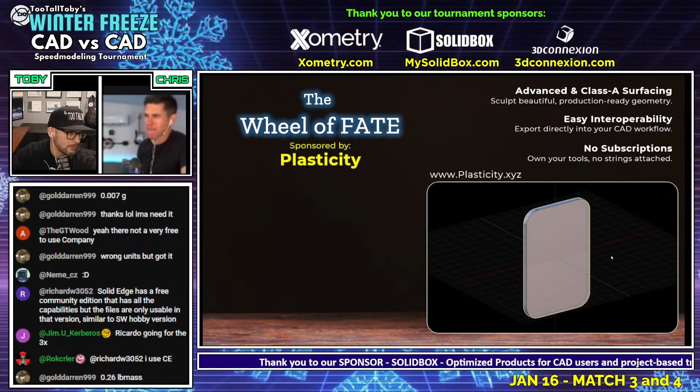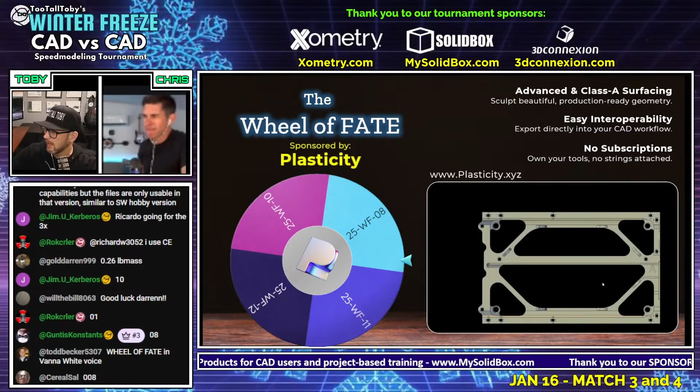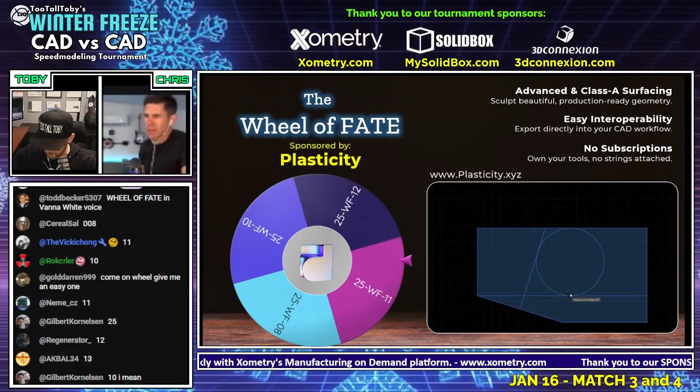Here we go, let's give this thing a spin. Let's see what challenge is in store for our runners. Okay.

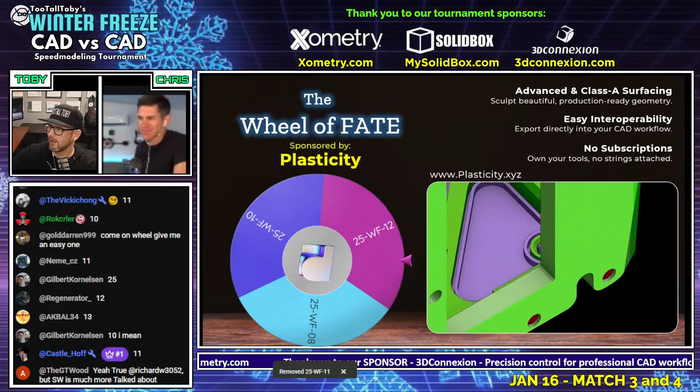Challenge number 11. Let's go, let's go, let's go. We're going to remove that one from the list. So here we go, Chris.

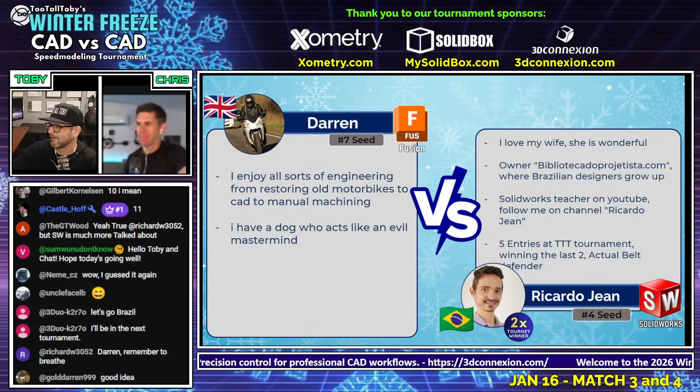This next CAD vs. CAD battle featuring Darren from the UK, our number 7 seed running Fusion, going up against Ricardo Jean from Brazil. He's a 2-time tournament winner, a world champion of 3D CAD speed modeling, and he's going to be running SolidWorks. This CAD vs. CAD battle begins in 3, 2, 1.

Go! What is the mass of this multi-body part or assembly, in x.xx pounds? The tolerance is plus or minus 0.01 pounds. We can see that this model is made in inches, and we can see that this is a snow shovel handle.

Both of our runners are grabbing a screen capture of this model. Both of our runners are jumping into their CAD systems, trying to come up with a game plan and trying to model this thing up.

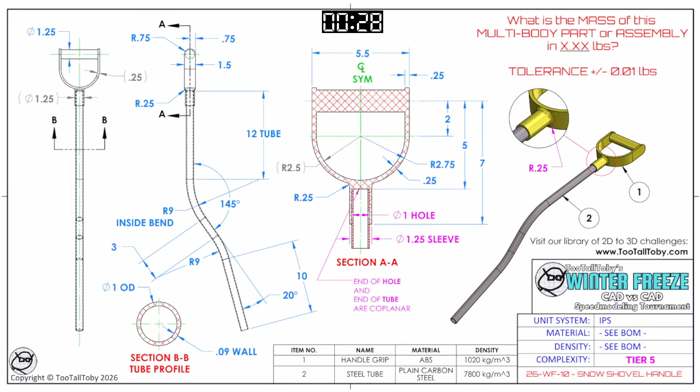It's made from ABS and plain carbon steel. And let's take a look over at the CAD vs. CAD battle. Here we go.

We've got Darren on the left running Fusion, and we've got Ricardo Jean on the right running SolidWorks. Both of our runners are trying to come up with a game plan. It's kind of a tricky part. You've got this tube. There's lots of different tools in 3D CAD to create tubes, to create bent tubes.

And so it looks like both of our runners have decided to start with the tube. Whenever we are working in 3D CAD, Chris, we will look at a model and we tend to kind of discretize the model into different areas. In the case of this model, you'd probably say one area is a handle and one area is the tube. I always find it interesting to see where our runners put the origin and which area of the model our runners begin with.

And in the case of this model, they could have started with the handle, they could have started with the tube, and they both decided to start with the tube. Very, very interesting.

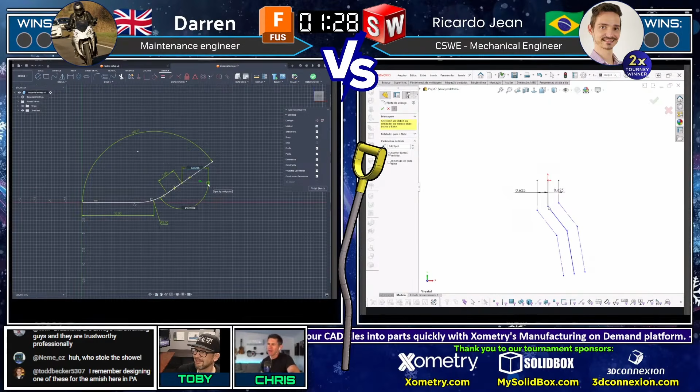I started my stopwatch because this is one of those models that I predicted could be under 3 minutes. I did, because I've seen Ricardo model things like this before real fast, but I'm very curious how, to your point, where they're going to start.

Are they going to treat it as a multi-body part, but some people would say no, that's an assembly, right? So there's some logistical challenges right away. Like, are you going to have the origin at the very tip of the shovel?

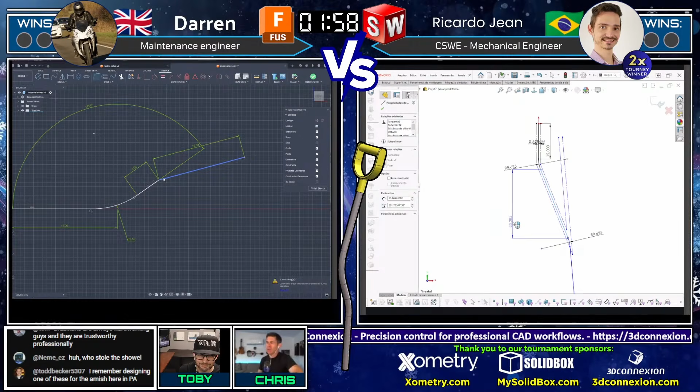Exactly. And if you think about that too long, you lose. It's over. Yeah, it's something that you really need to get in the habit of looking at a model and kind of deciding where's the origin going to be, and why you choose where the origin is.

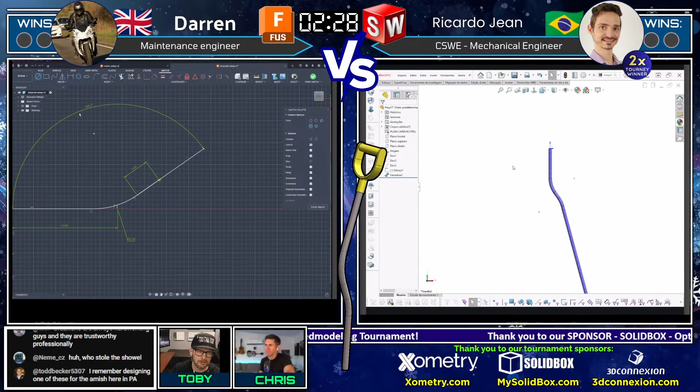It's different for each model, but it's one of those things where the more you practice, the better you're going to get at it, and the more it's going to become second nature.

And so we see here our runners going through and trying to come up with a solution. We see Darren going through, and it looks like he's working on the sweep geometry for that handle.

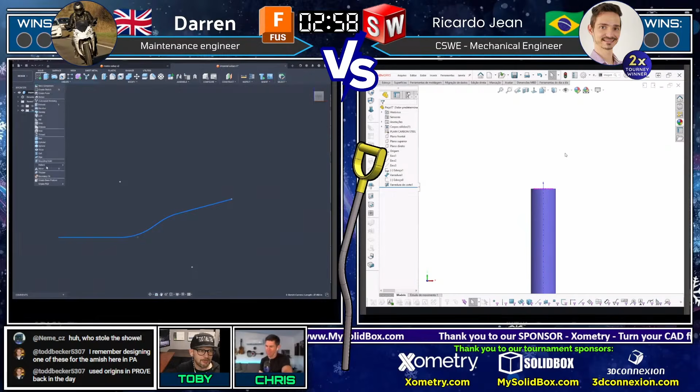And by the way, Chris, I know you mentioned you started a stopwatch. That's actually going to be a thing of the past with the modern technology of the Too Tall Toby CAD vs CAD tournaments. We actually have a clock overlay right on the live stream. So we're currently at 3 minutes for this model.

I'm surprised what I'm seeing, actually. So I can see there's a way to model this for the tournament to get the answer quickly, but that could bite you in the butt later, right?

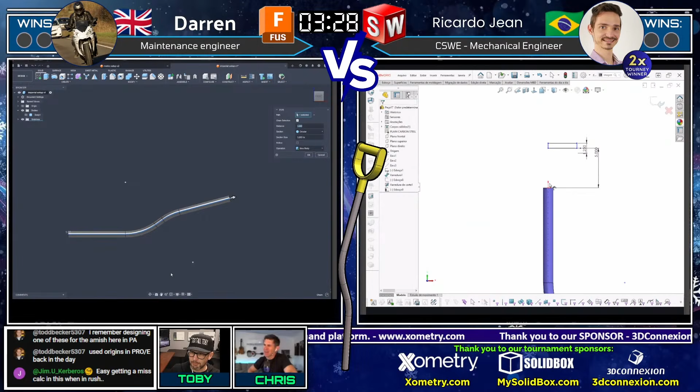Hopefully this is a topic we've had come up quite a bit, and hopefully we're teaching people how to do both. We want you to be fast, but making a fast model that's not stable is not really good.

It's like the analogy of playing scales in music. It's not really good if you can play a scale really fast, but every note is a bad fret. That doesn't really help anybody. You want to kind of think of CAD the same way.

And so recently I've been making videos where I'm trying to show that you can have both. You can speed model and make robust models. You can do both. And that's really the true path to mastery, right?

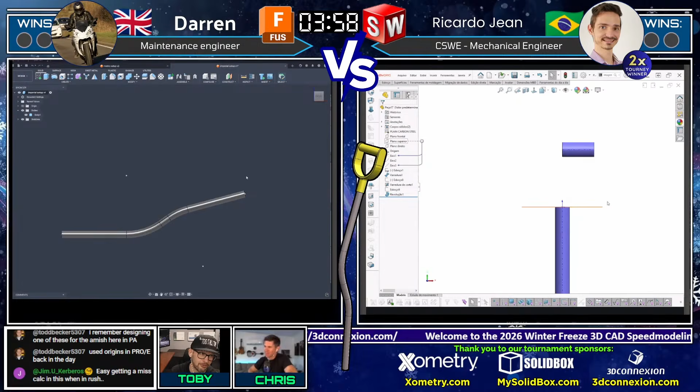If a master electrician comes over to your house, they're going to be able to install a whole new circuit a lot faster than you, but that doesn't mean that they're cutting corners. It doesn't mean they're speed running the installation. It just means they've learned how to master their trade.

They know how to use all the steps, and they know how to get out of a problem quickly if they get into one. And that's what we see a lot of in this tournament too. We see people making mistakes and having to backtrack, and sometimes that's what makes the difference between earning a point or losing and getting knocked out.

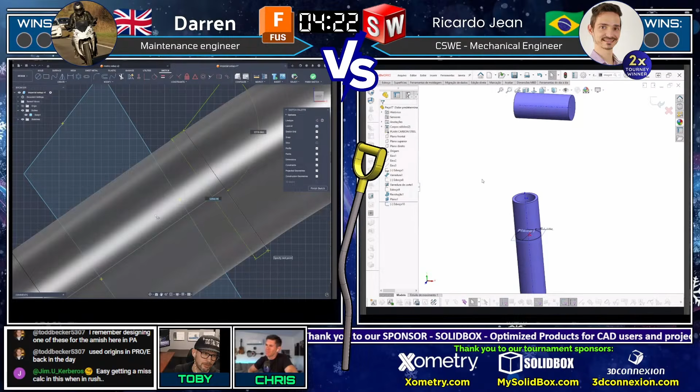One thing I could say is that the level of play in competition now is pretty high, because this kind of part, in the first season or a few years ago, it's been 4 years already - at least where we were seeing really competitive people - this would have taken a while in the old days, I think.

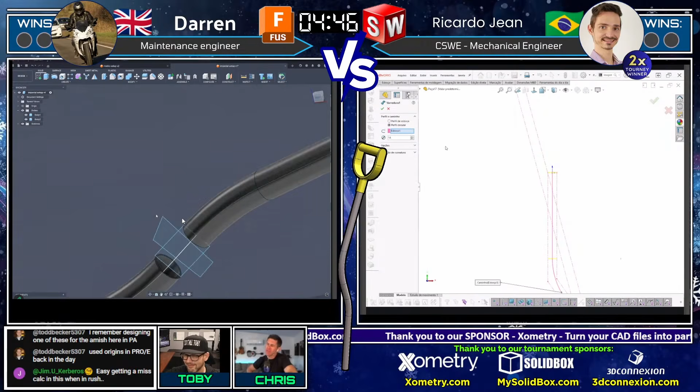So we're at a point where these fairly complex models are still being done under 5 minutes. It's pretty remarkable. It's interesting.

It's cool to see Ricardo Jean kind of struggling here. Really, both of our runners kind of struggling here.

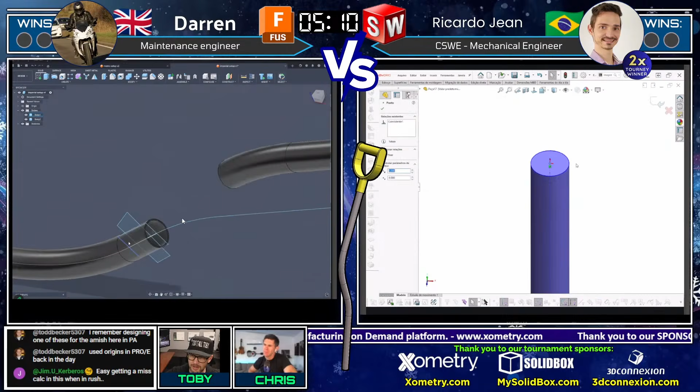This is where I think we can really learn the most from watching these CAD battles and especially reviewing the videos afterwards. Seeing what a professional like Ricardo does when he does get stuck, when he does start getting errors in the tree. What tools does he use?

I saw him use the rollback bar there. I saw him reading the error messages that were in the tree. It's really interesting to see how these professionals troubleshoot when things go wrong. Yeah.

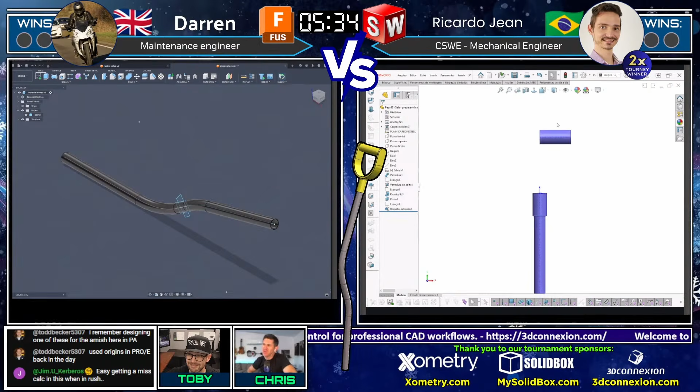One of the challenges with this model is that it's also long enough that you have to zoom in and out to understand where you are at all times. You just kind of reframe it and take a second to make sure you're on track - are you actually modeling this correctly? And so that's a challenge.

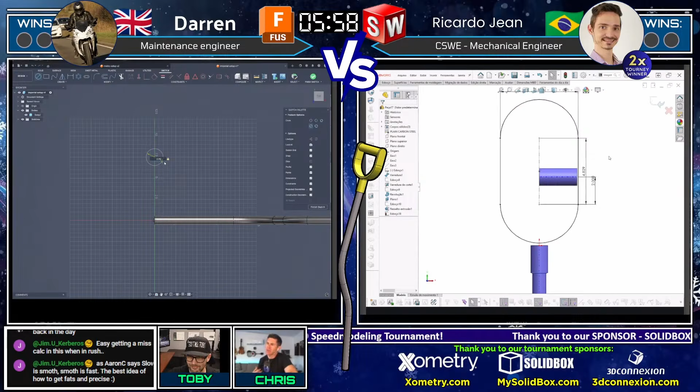I keep wondering if the future of CAD will make zooming and just viewing your model a lot easier. I do hope for a day where VR goggles and all that augmented reality stuff makes it a little quicker to interact with the model.

Because there are some - you start to realize the limitations of working with a 2D screen when you're watching people model something like that's this long and swoopy, and you kind of need to see it in 3D.

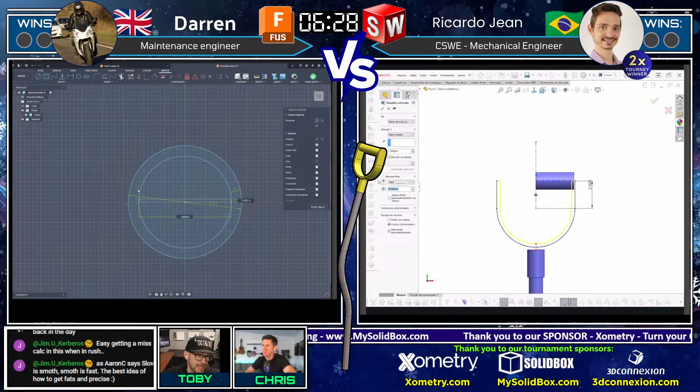The benefits are definitely there for incorporating some of that technology into CAD, and we've seen some innovation along the way. I think that's where probably AI will really start to shine, is making that less herky-jerky. That's kind of the main concern right now. When you go under a set of goggles, things get real, you get motion sickness, it gets real herky-jerky. I think that's where we're really going to see AI shine, in smoothing out some of those interactions.

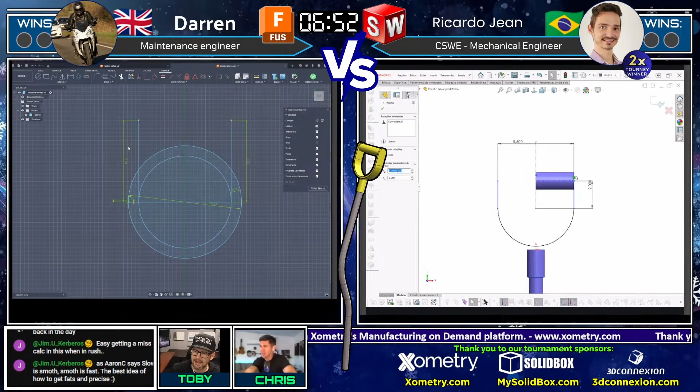Speaking of smoothing things out, it looks like Ricardo Jean is back on track now. He struggled there for a little bit getting that sleeve in place and figuring out where that pipe was going to end, but it looks like he's at least moving through the features a little smoother. You can always tell when you're watching a fellow CAD jockey, when things are going smooth versus going a little sideways. It looks like he's now feeling a little bit more confident, cruising through the features without getting errors.

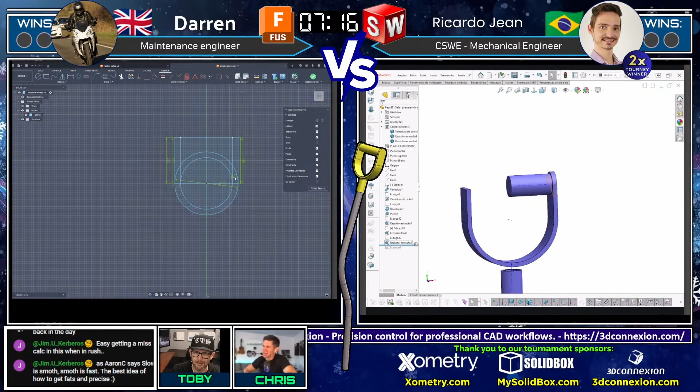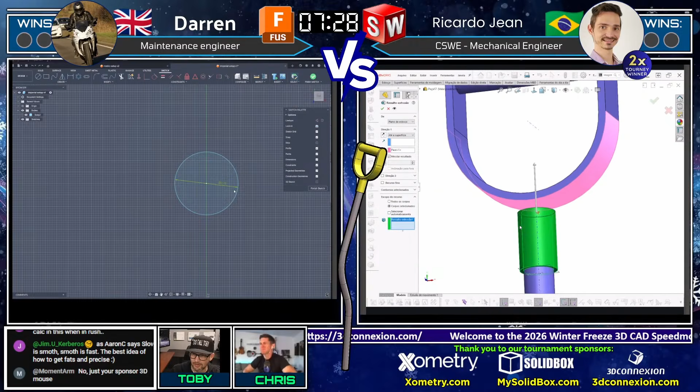Meanwhile on the left, we've got Darren going through, and just like we saw in the last competition, he's at a very similar spot here creating that kind of rounded, almost horseshoe shape for that handle. Now we see Ricardo merging that transition into the handle. Looks like he maybe did a combine there. I think the reason he needed to do that combine was because he needed that common edge to do that fillet he just applied.

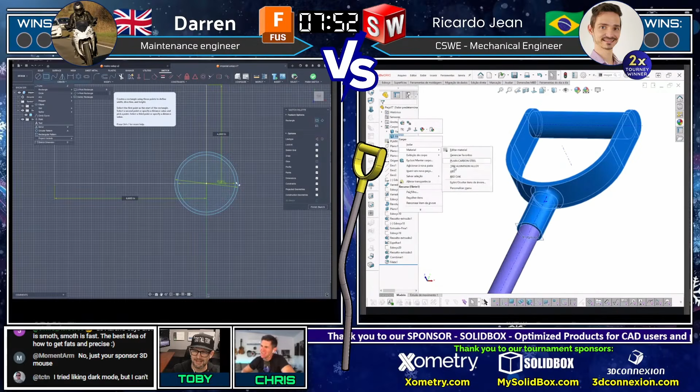You can see it's kind of night and day from where he was about 4 minutes ago. He was just really struggling to get any features on screen, and now it looks like things are moving forward a little smoother. So we may end up seeing an answer here. We're going to keep an eye on the chat and our answer key.

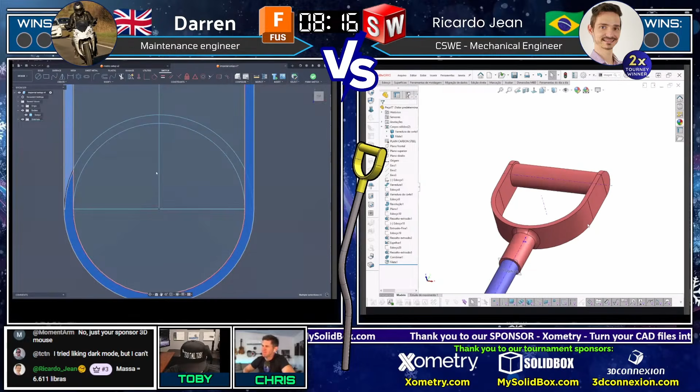It looks like Ricardo has come in with an answer here of 6.611 pounds. That is not correct. So we're looking for this answer in x.xx pounds, and Ricardo's answer of 6.61 pounds is not correct. So Ricardo now needs to go through and examine his models to try to figure out what exactly went wrong, where maybe things were off.

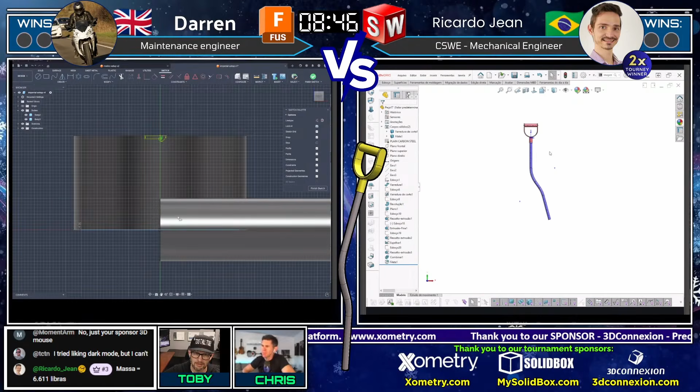He's going to look at the drawing, look at his model, see if he can't spot anything that looks mismatched between the two. Oh, and Darren, interesting — Darren opting to create the handle and the tube in two separate features. Very interesting. And watching Ricardo here, he was modeling it up, deciding to put the handle on a 90-degree angle, maybe coming up with a new design for the shovel. Very interesting as well.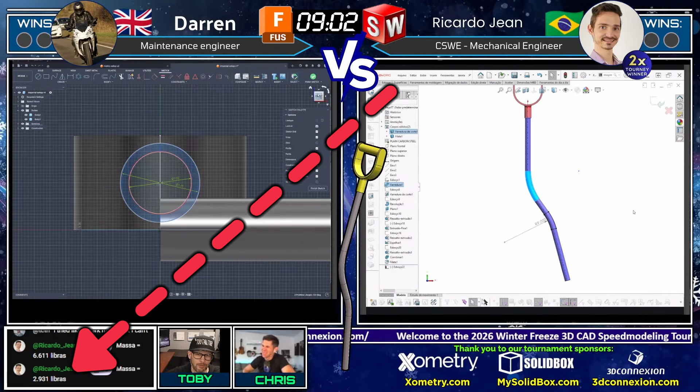I love this, this is where things get kind of interesting. Maybe Ricardo just decided once he got to the point of creating that handle that his orientation was wrong. Of course in the real world you could always just take that body and rotate it 90 degrees, but for the challenge we're doing here, we're only looking for the mass. So some models, it's really important you design them together — for example, that last model with the space heater was one that was really important to design together.

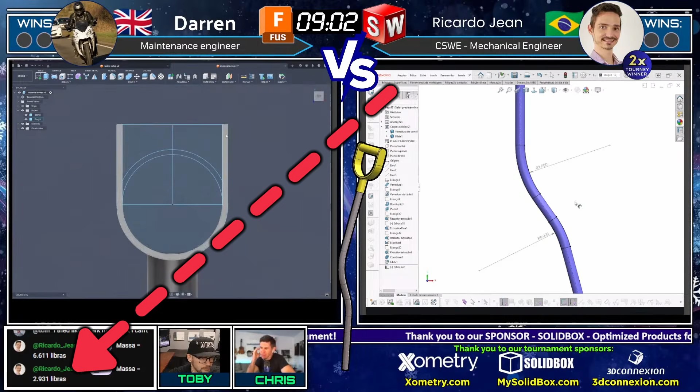Toby, I think we have another mass — there's another mass entry here. And so we're seeing the answer come in here, and it looks like the answer coming in is 2.93 pounds, and that is correct.

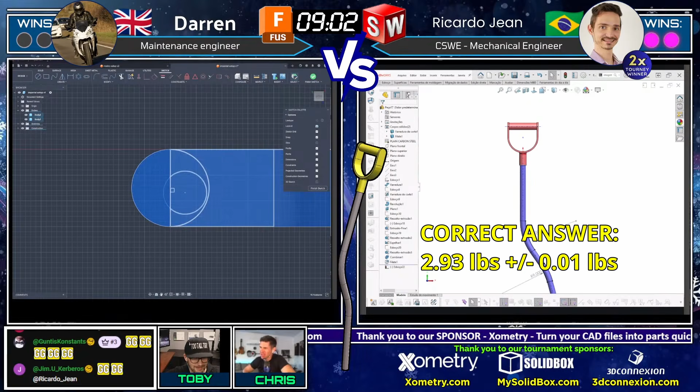So congratulations to Ricardo Jean. Well done, my friend, congratulations. And wow, very nice, very nice. Well done, wow, a good match. Could have gone either way.

I think that other shovel, Ricardo's design is actually probably more ergonomic for a shovel. Maybe, yeah, holding it like that. I think you're onto something, Ricardo. Maybe, holding it with your fists kind of facing forward maybe is the way to go. But wow guys, what a matchup and what a win.